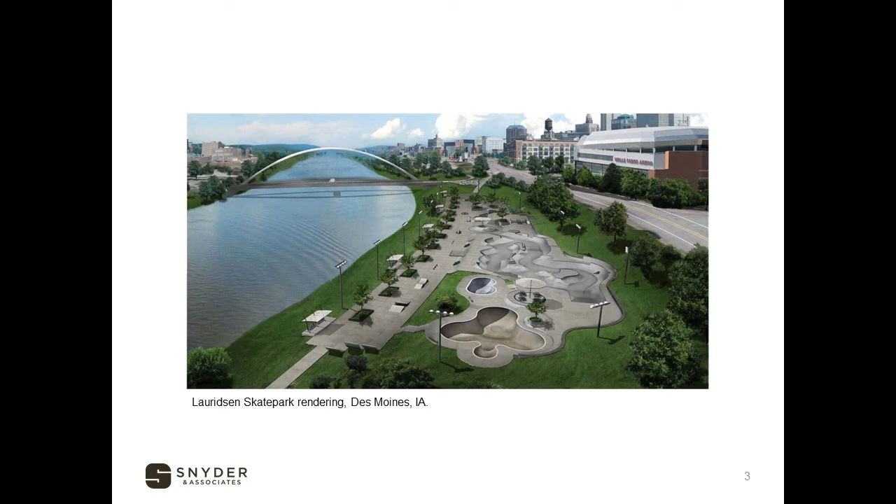There's a rendering of what we see today. A lot of people put skate parks underneath bridges or on the outskirts of town. Here in Des Moines, it's centered and accessible to kids, which is the best of all worlds because you can drive by and see it on 235. It's got the river next to it, and it's accessible to a lot of kids. It's a great location.

In 2015, the Community Foundation Leadership Circle Challenge Grant came to be. This is where some high-level philanthropists within the Community Foundation pool their resources and land on a big project every year. One of the projects they landed on was this skate park. They loved the idea, so in 2015 they put $500,000 on the table—a giant amount of money. It needed to be matched by December 2017.

We had to find a way to make sure that we got that match, so Angela, Christina, and I talked to the Community Foundation. They allowed us to put our committee together, and we got the grant extended into the next year. The whole project at the time was about $3.5 million. We knew that we needed some big money to come in early. We got interest from donors: MidAmerican Energy, Community Choice Credit Union, Prairie Meadows, Wells Fargo, and a ton of great donors.

I will never forget February of 2018. We were looking for a $1 million naming rights contribution. I got the phone call that the Lauridsens had agreed to a $1 million contribution. That was a pivotal moment and set us on a path to success.

At that point, we got a call from the Community Foundation, and they said they have a private donor that wants to put a skatable art feature into the park.

We had this international competition where artists from all over the world came in to pitch us on skatable art, and the result was unbelievable.

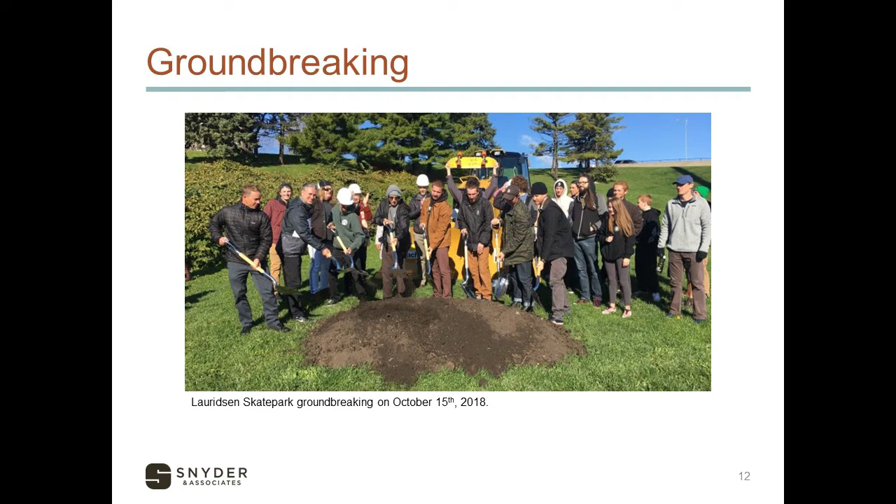2018, Skate DSM starts the fundraising, and we've had a groundbreaking. My team at Snyder and Associates, and Chuck Britson, got involved. We were teamed up with California Skateparks, and we were operating under the umbrella of Polk County and Polk County Public Works.

We were challenged with creating a design project and construction documents to move as quickly as possible and to start building things as soon as they were designed.

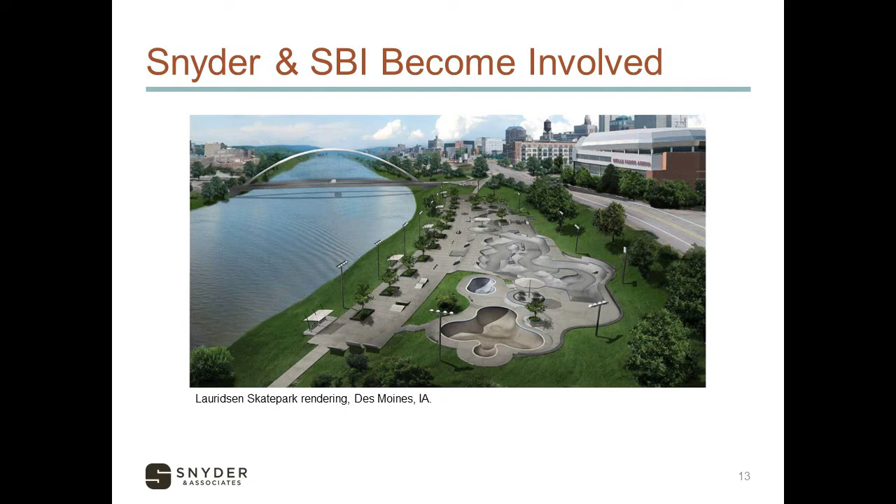Our charge was to deal with the site conditions and find out how we were going to make this conceptual drawing a reality. As you may remember, this site is a pretty significant hill, about a 5-to-1 to 6-to-1 slope. We needed to create a large flat pad area so we could place this large 88,000 square foot footprint on a flat surface so it could exist on this hillside.

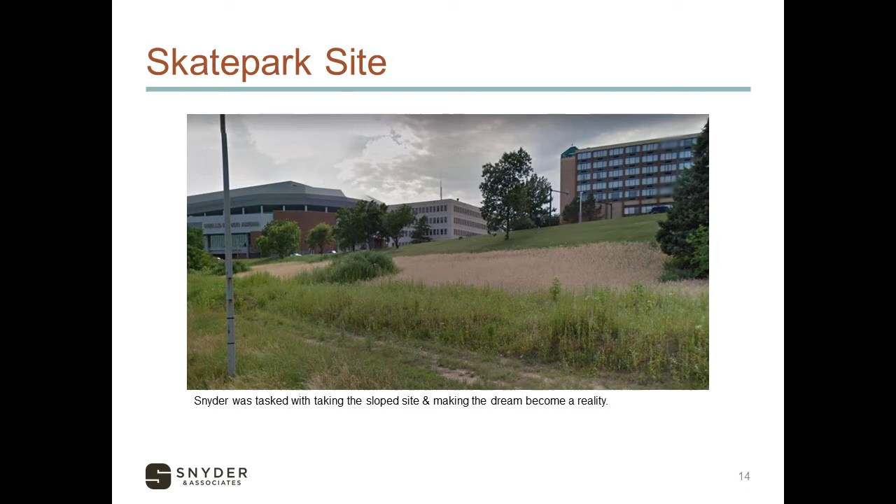There were a number of things we had to take a look at right away. Slope stability was the first, understanding how much of a slope and how much retaining wall we could build on the project area. We also had an added challenge that the skate area wasn't nailed down yet.

So we tried to keep a large oval shape to reserve for the skate park as it's being designed in more of a final state. We had to maximize that pad area. We also had flood elevations and permitting and river modeling in that area.

We had to maintain flows during construction so we didn't interrupt any storm sewer service downtown. We had to locate and expose some of the utilities, understanding their depth, size, and exact locations. In the end, the only thing we had to relocate was a little bit of storm sewer vertically and an electrical main, which MidAmerican came in and did after the retaining wall work.

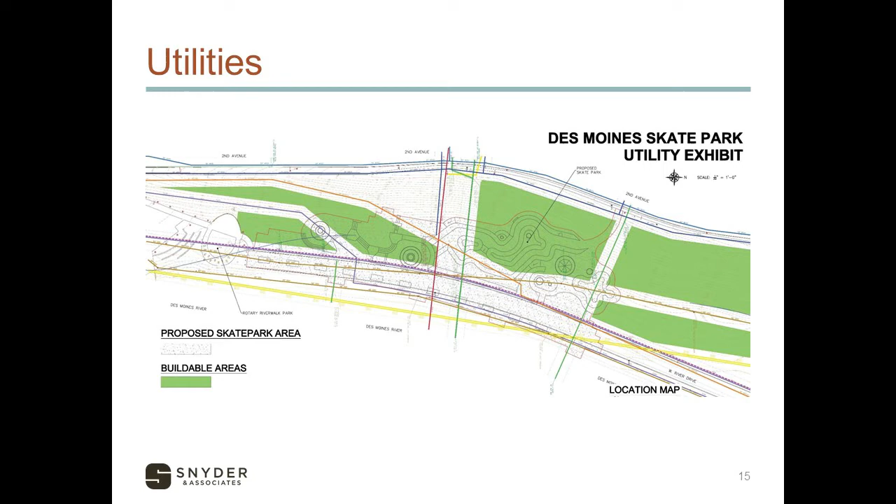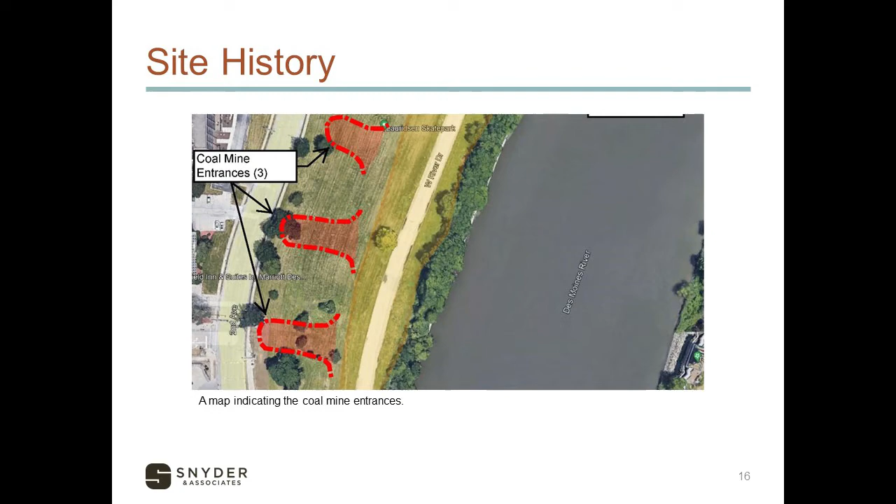It was a mix of concrete, glass, cinders, plastics. There was even coal in some of the borings we took. That unconsolidated fill has the potential for settlement and soft spots. Then we have the opposite problem in some parts of the site where we have weathered bedrock and shale that extends from the shallowest point at 2 feet down to 17 feet deep.

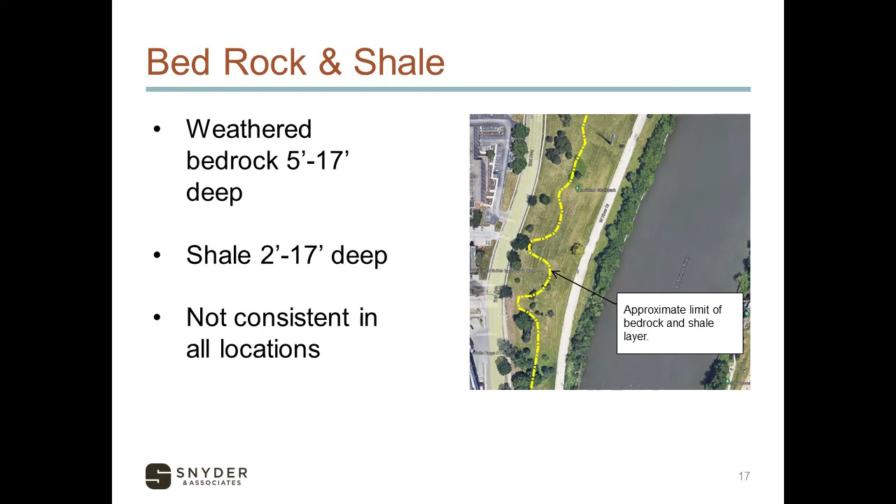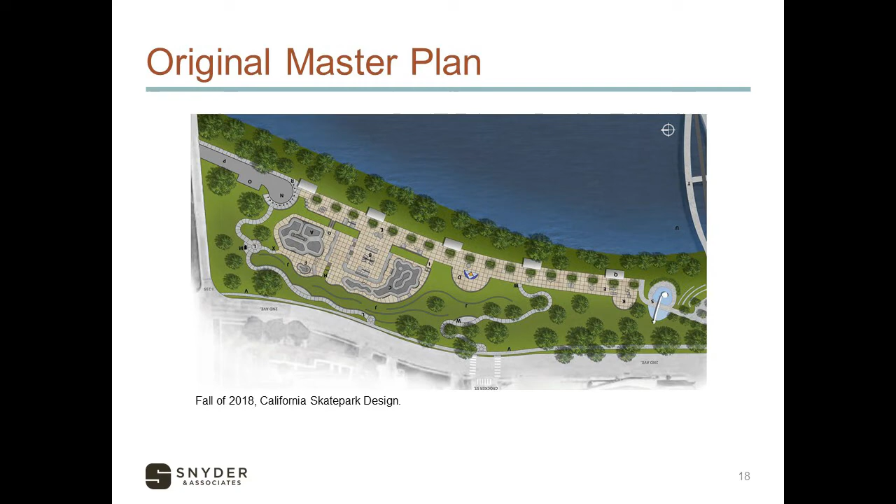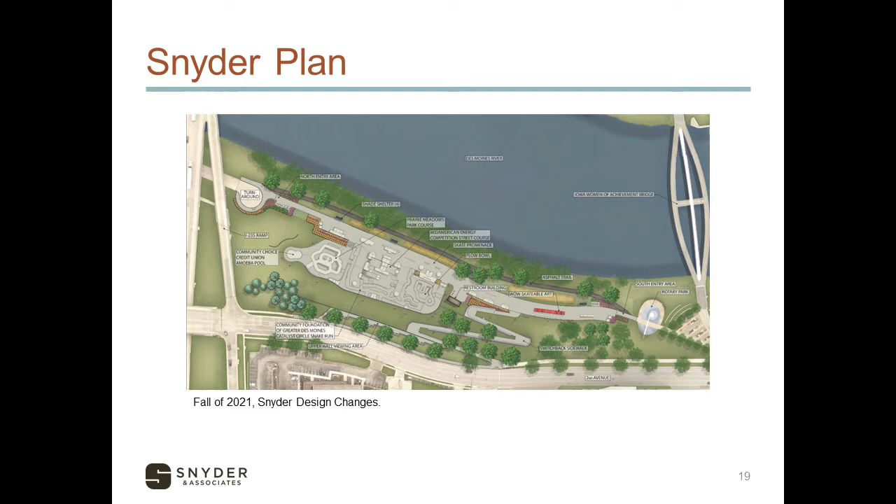So what we started with from California Skateparks had to be redesigned. We took their master plan and tweaked it through our design based on the utility locations, the slope stability, the retaining wall design, and the access due to the 30-foot elevation change, and came up with a different master plan, which has a large switchback sidewalk and provides accessibility down to the skate promenade. The skate park proper was narrowed and lengthened so that we could fit it on a more narrow footprint.

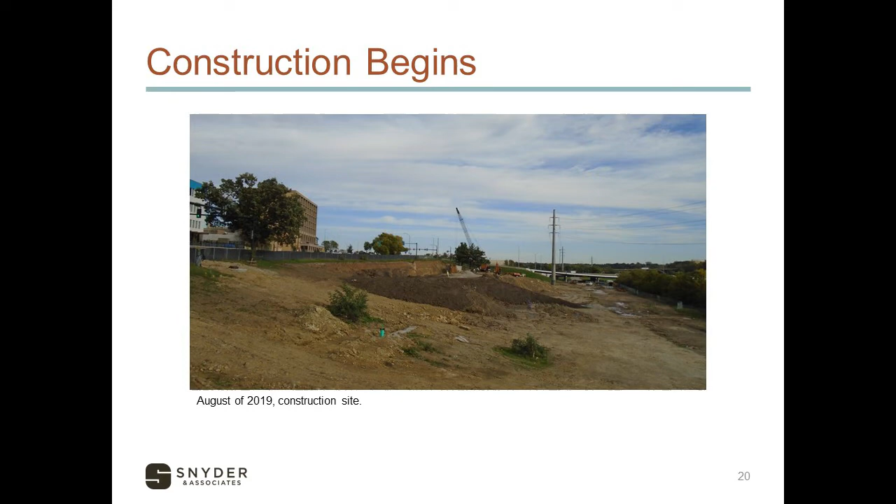In August of 2019, we worked over the winter with California Skateparks and got far enough along that we felt comfortable to start construction through the efforts of McAninch, stripping and clearing the site. We had to start excavating for large walls so that we could create this large pad area. You can see in the background that storm sewer exposed there. We had to drop that down and allow for that to cross under the skate park.

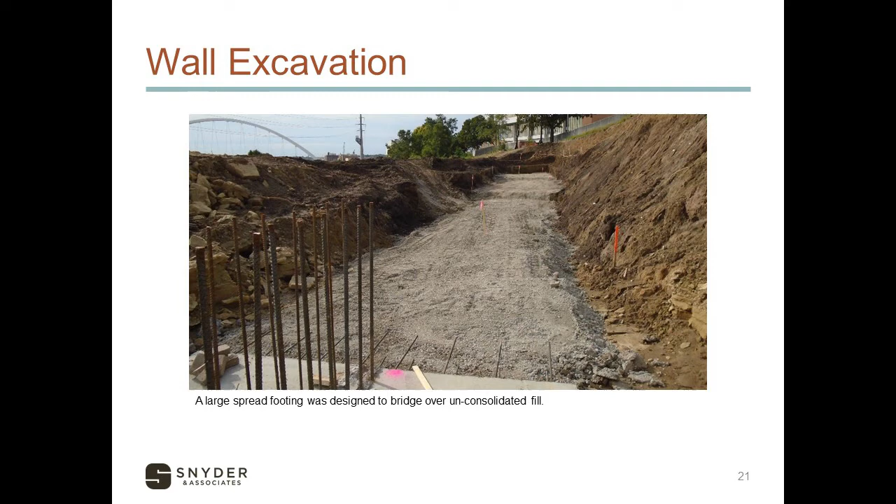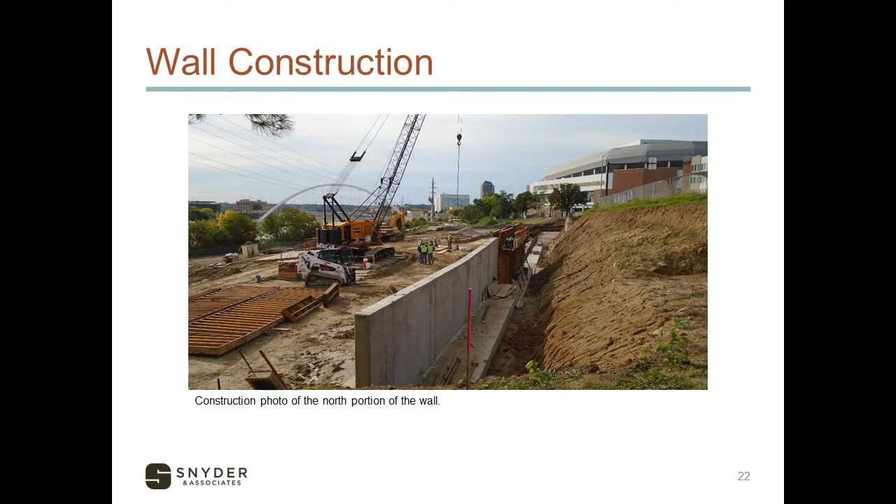I identified a number of areas where we had some soft or unconsolidated fill, so Chuck Britson, our structural engineer, designed a large spread footing that we could bridge over a number of those different areas. It was really important to have a wall system that could go through any of those different types of soil layers. Here's a photo of people working on the original north portion of the wall where we started. Another good look at some of the rock and shale that they had to excavate through to set the pad.

Here's a shot to the south showing the big concrete retaining wall that would create the backbone of the project. Other parts of the park didn't require the large, expensive, rigid retaining wall system that we designed for the north part. We designed a wall system that was a little more flexible based on modular units that would allow for a little bit of settlement, yet not degrade the structural integrity of the wall.

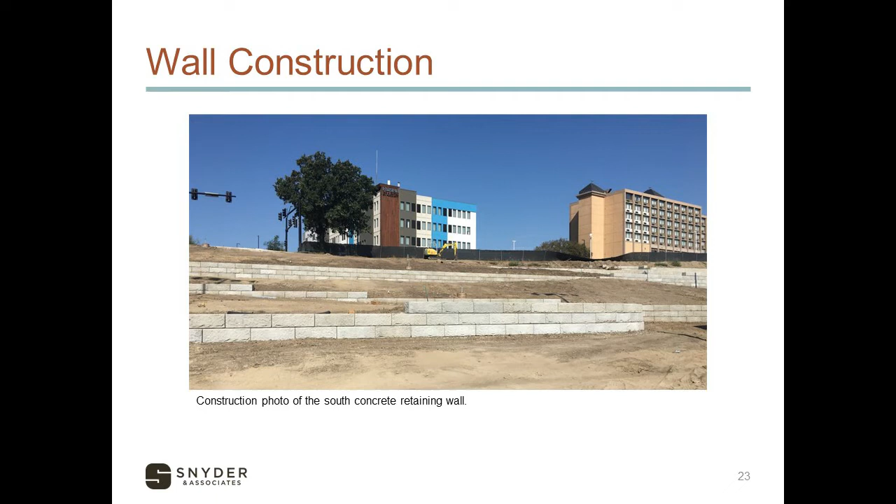So we had created this large platform through our wall work, our utility work, and we were ready for the skate park. And that's when Zach and his team started to roll out their final designs.

This is the park course, one of the 2 Olympic courses. It's high quality, a high degree of difficulty, designed to host amateur to world-class professional events. It's got 10-foot vertical transitions throughout, hips, extensions, escalators, gaps, rails, and transfer areas. A lot of components wrapped into one skatable area.

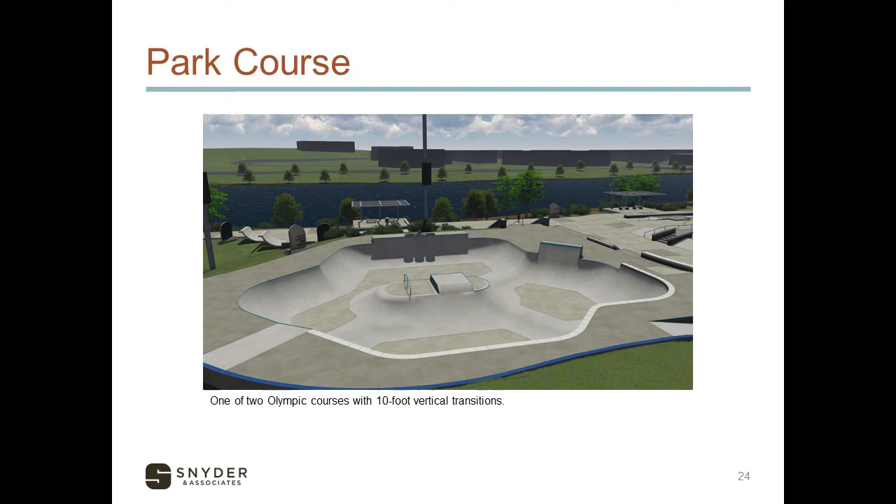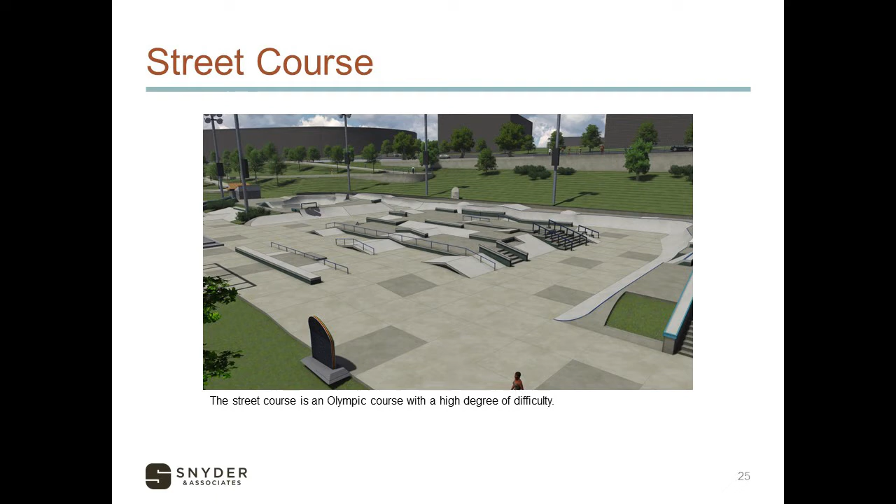The street course is the other Olympic course, also has a high degree of difficulty associated with its design and skatability. This contains a lot of ledge types, rails, steps, banks, gaps, hips, and transfers. A lot of different components that maximize creativity as you're doing your different types of runs.

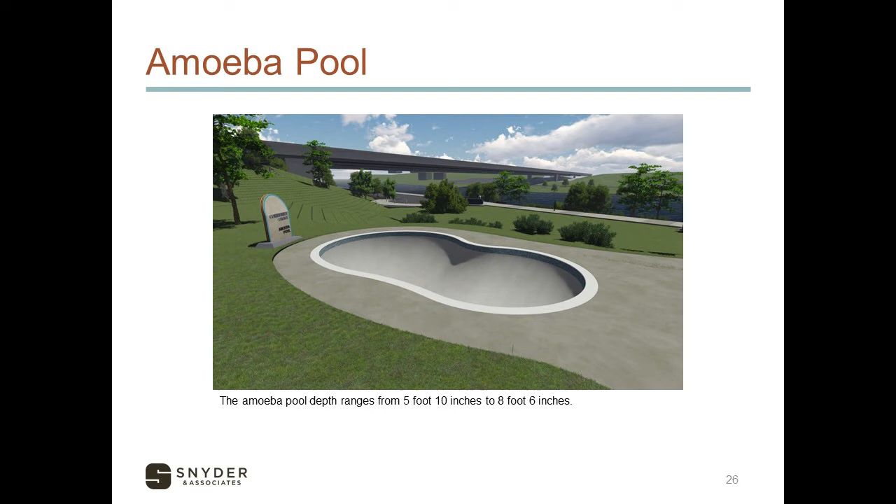This park was unique in that it spanned a gap of professional down to beginners. Someone who's training, someone who's more recreational, someone learning the sport can be with other skaters at that same skill level and graduate out into other parts of the park.

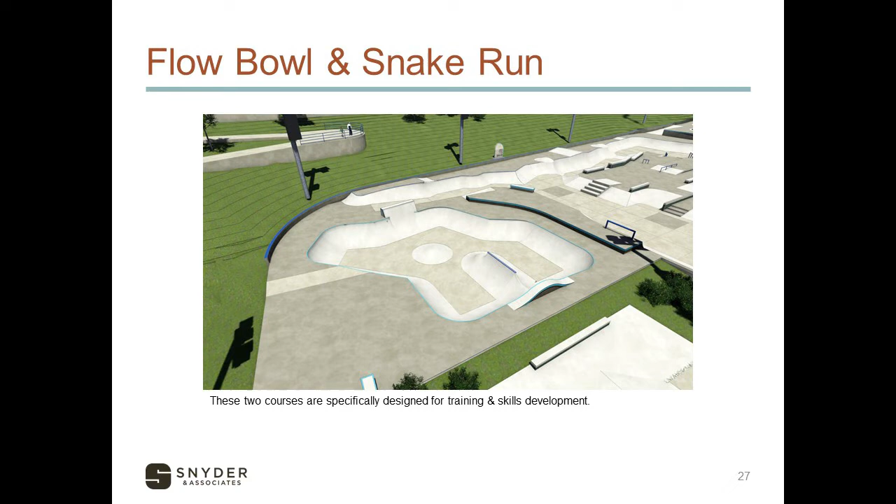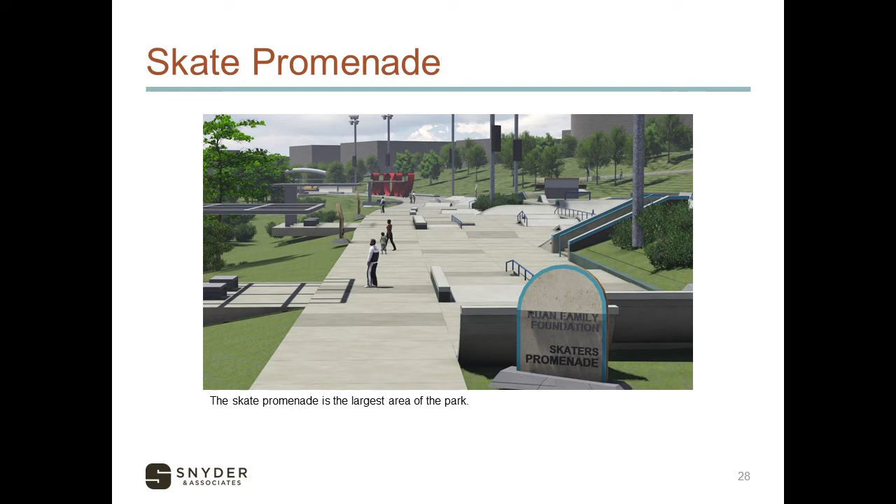The 4-flat-4 incorporates steps, rails, curbs into multiple skatable component areas. Same with the 16 stair.

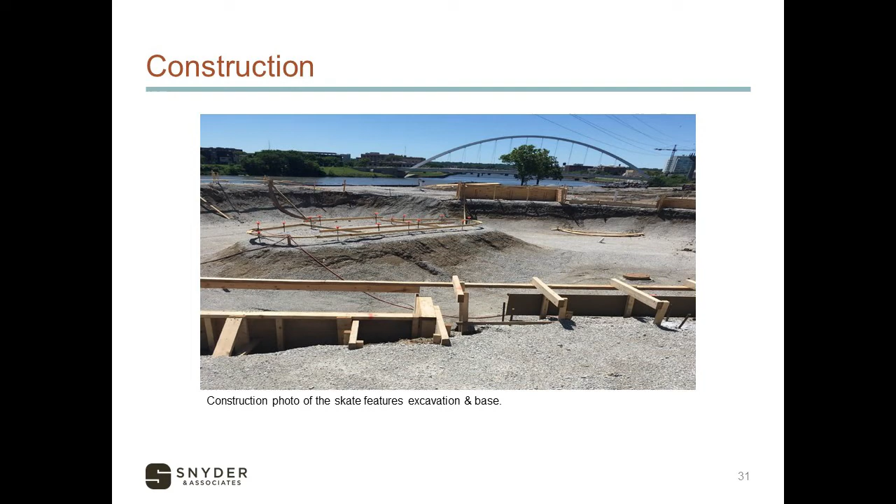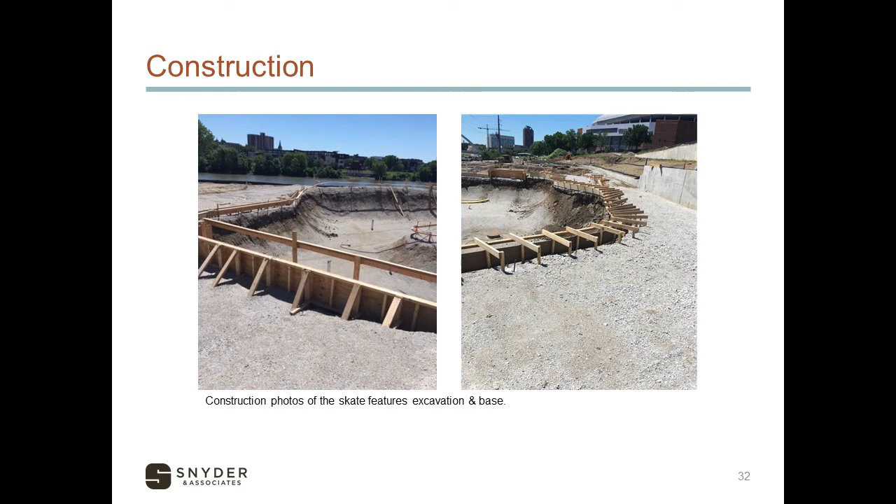We got the design done. We're ready to get to work. California Skateparks moved in spring of 2020 and started to work on how they were going to get all of this formed out and excavated. A lot of specialty formwork. This is a great picture showing all the rebar and reinforcement associated with it. You can see some of these special forms that are very curvilinear, set the shape of the component. All the metal and all the formwork was fabricated and shaped on site.

They had a couple of different areas where they did all of this fabrication and would just take it step by step to incorporate into the concrete work or into the edges of different skate components. It was quite impressive to see the work that they brought in and were able to do on site.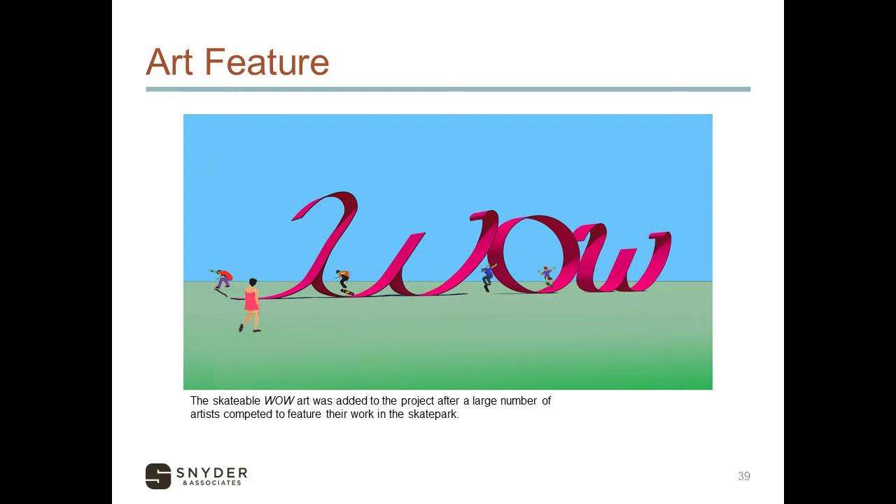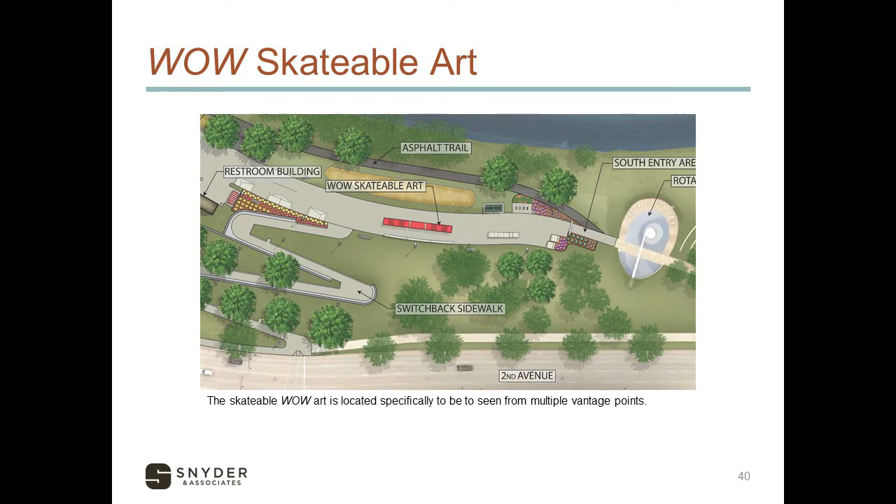Then we moved into the WOW. As they were working on the components for the skate park proper, we worked with metal fabricators to get the WOW delivered in late summer of 2020. It's located on the south end of the promenade. We wanted it fairly close to the switchback, so people coming down from Wells Fargo and the 2nd Avenue corridor would be able to identify this art piece and look at it from different vantage points above. It also anchors the south end of the skate park.

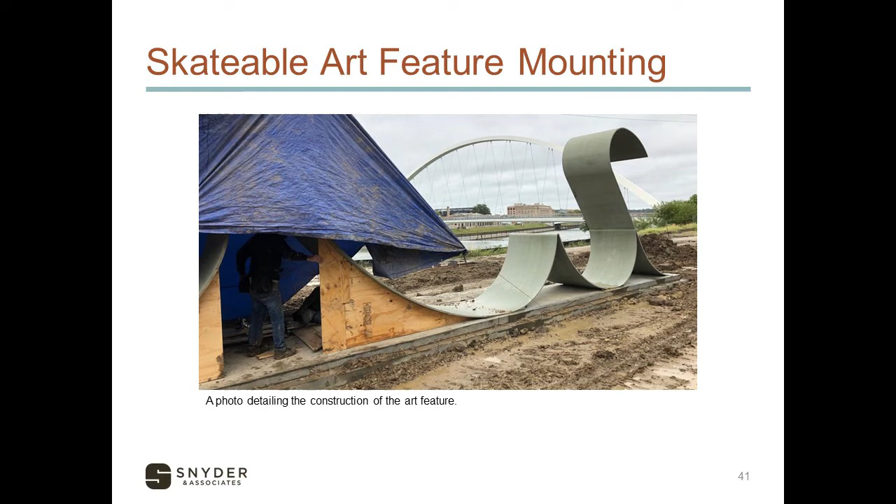There's an 84-foot long by 4-foot wide by 4-foot deep reinforced concrete footing to keep the WOW anchored, with 3/4 inch steel plating, and it's 12 feet tall. This is after it was craned into place and attached.

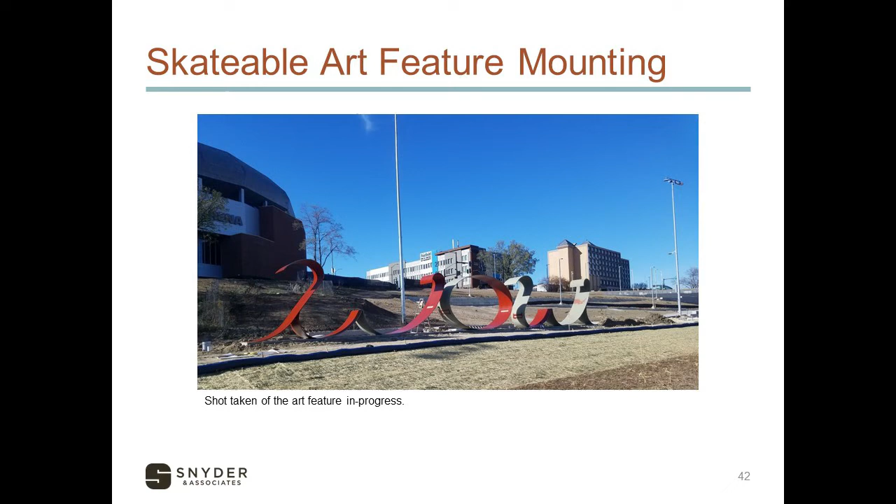We started to take a look at the support mechanisms and design stabilizers. In the meantime, the WOW needed to be painted. They selected candy apple red for the WOW to really make it pop and to emulate the artist's original thoughts.

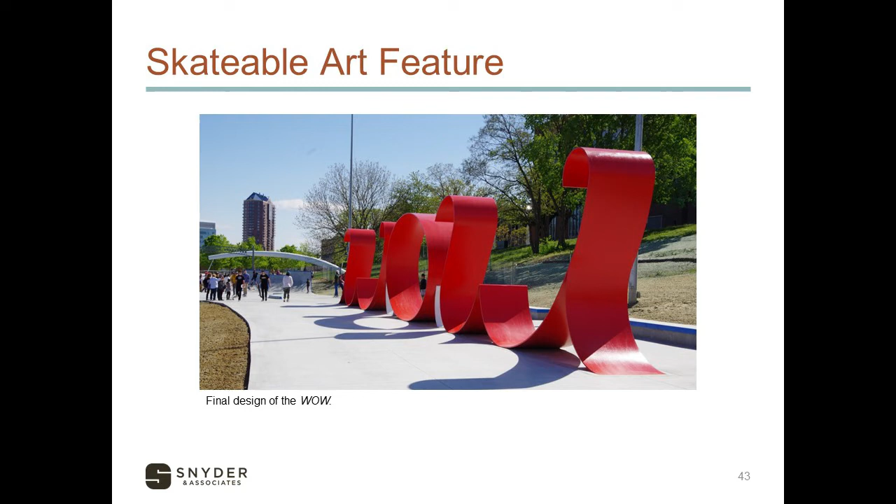And here's the end product. You can see the stabilizers were painted in gray that matched the sidewalk. They blended in and you still saw the WOW cursive element. All these areas are skatable, flush with the concrete, so you transfer right from the concrete onto the metal surfaces. That was very specifically designed by our structural engineers and Zach with California Skateparks. It's a very popular element in the park, valued for its artistic value. It's just an out-of-this-world type of element.

We were at the tail end of 2020. The Olympics had been postponed till 2021 due to COVID, so we were trying to get as far as we could by the end of the year and wanted to button up the project for the winter, then complete it in the spring of 2021. We were targeting a July completion date.

We had heard that California had shut down all of their public areas, particularly the skate parks, which inadvertently caused the Dew Tour to not have a home for 2020 and potentially 2021. That led them to worry about where they might have an Olympic qualifying event. Since the Olympics had been postponed till 2021, they were looking at postponing their Dew Tour event to 2021 as well, since they couldn't utilize the skate parks in California they had previously planned on. They started to look elsewhere.

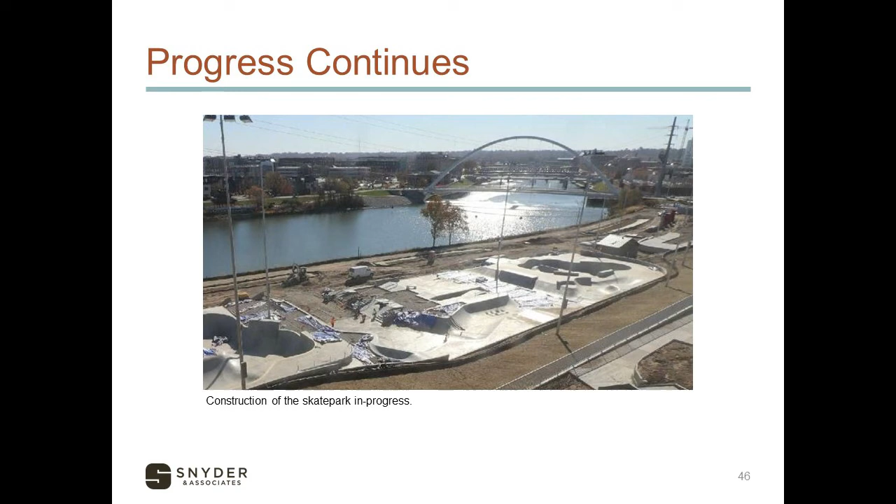They started to look at Des Moines. This was November of 2020, and their event was set for mid-May of 2021. There was a lot of concern as to whether we could have the Des Moines site ready for this large event. The skate park was about 75% complete, the switchbacks from the Iowa Event Center were about 50% complete at this date, and we hadn't even started the skate promenade. This photo shows how far we had gotten on that November 9th date when we heard they were interested in Des Moines, with about 60 days to complete the project.

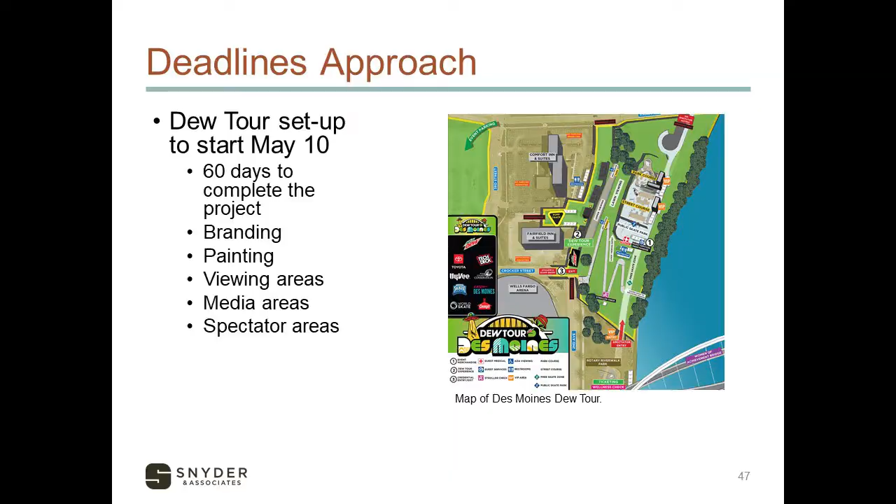We still needed to complete a lot of the flat work in the street course and in some of the bowls. The switchback was about 50% done, so we really hurried up and tried to get as much work done as possible before the winter started.

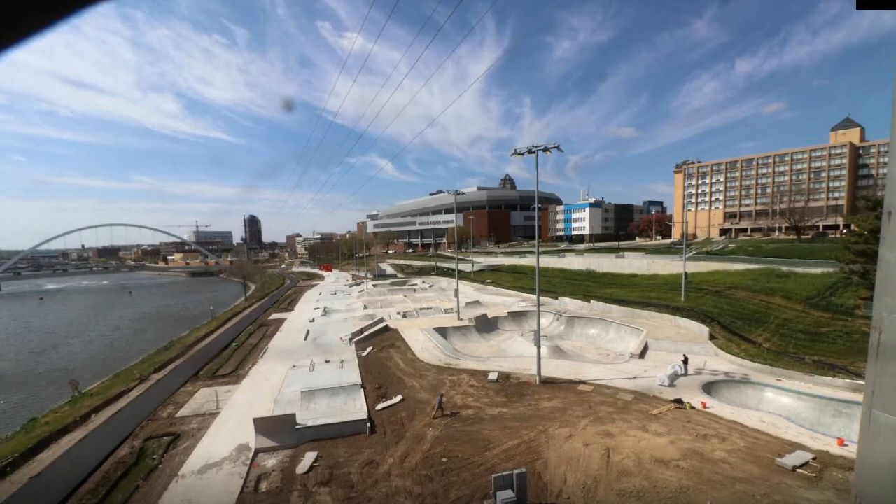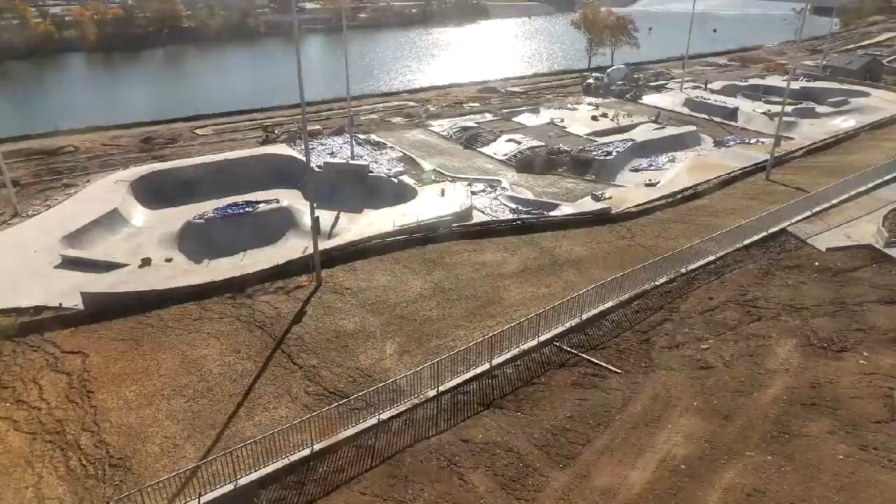There's a bunch of different components required to finish off the work, including all of the metal work. We weren't able to do anything over that winter, but on March 9th, 2021, McAninch moved in to start prepping the promenade subgrade. Then California Skateparks moved in on March 12th, so we could meet the May 10th completion date. We started almost exactly 60 days prior to the completion date to try to finish up all the earthwork, pavements.

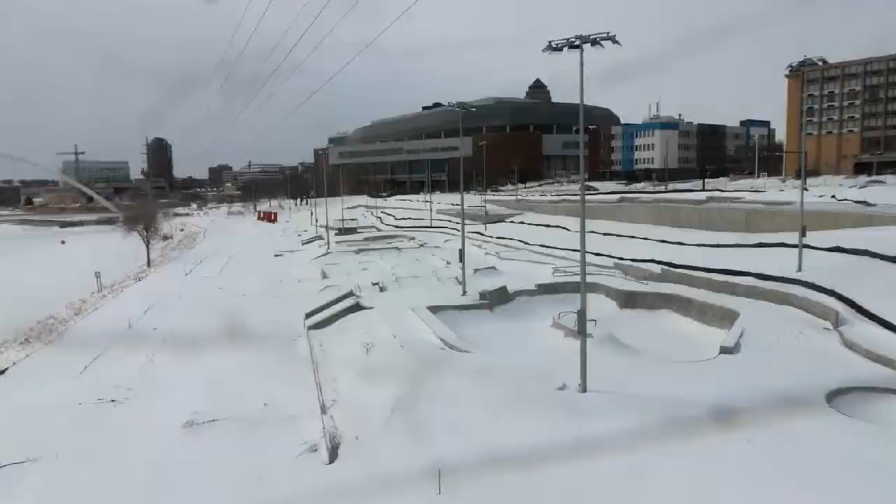Normally, we wouldn't be able to guarantee any site work to start until April 15th, but everyone on the team was excited to get moving, try to get in early, and we're really dedicated to getting the project completed on time so Des Moines could host the Dew Tour and the first Olympic qualifying event.

You can see the promenade went in fast, the skate components got built quickly, and then we get to mid-May where the Dew Tour started to set up all of their different components.

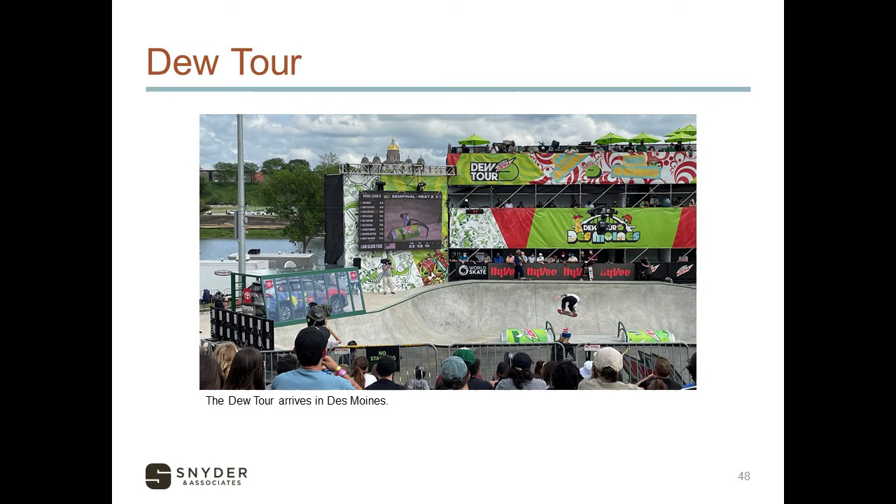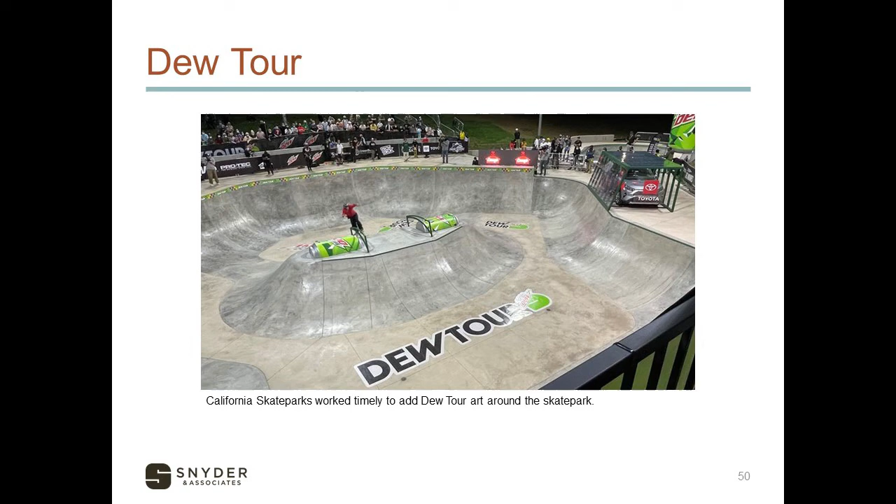One of the great things that happened as a result of building the largest skate park in the nation, and some of the national attention we've received, is if you go to the skate park over the summer in the evening—I don't care if it's a Wednesday, Friday, or Saturday—it's jam-packed with kids. If you go there in the morning, it's jam-packed with kids. It's super exciting to see that the kids have embraced it.

They're working with each other, encouraging each other to use all the elements. One of the best things about this skate park in particular is when the guy from the Tony Hawk Foundation came by and was walking with me across the skate park, he said, 'I get paid to go to skate parks all over the country, and this is hands down the best skate park I have ever been to.' And I said, what is it?

Is it the scale? Is it the location? And he said, 'You know what it is? It's that.' And he pointed to a dad holding his daughter's hand as he's teaching her how to skate. He said, 'This skate park has elements for everybody, and there's no other skate park in the country that has elements for beginning skaters up to the pros. This person who's learning how to skate now will gravitate through these elements and become an excellent skater. And the next wave of Olympians is going to come from Des Moines, Iowa.'